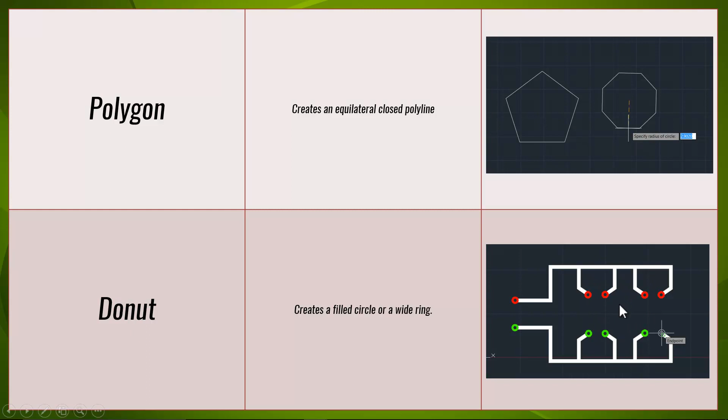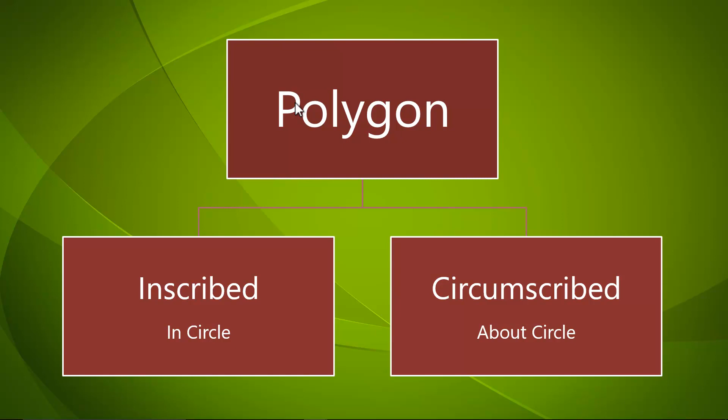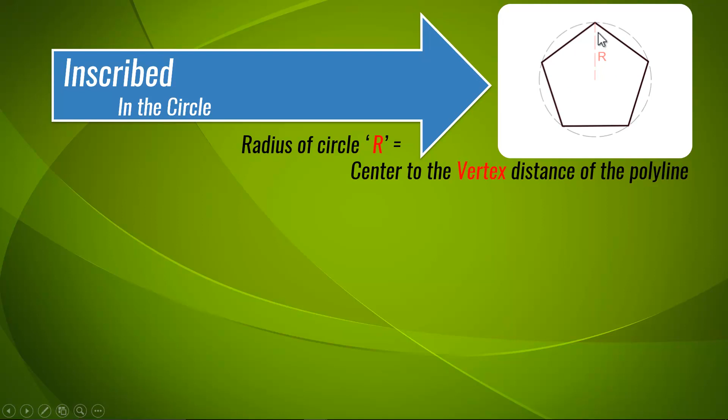So let's learn more about polygon. There are two options to create a polygon: inscribed in circle and circumscribed about the circle. When you use the inscribed in circle option, the polygon comes inside a circle. As you can see in the example, there is a dotted circle shown, meaning the polygon is inscribed inside an imaginary circle with radius r. So the radius of the circle, r, equals the distance from the center of the polygon to the vertex of the polygon, like this.

The next method to draw a polygon is circumscribed about the circle, meaning the polygon circumscribes a circle, so the circle is inside the polygon. Here it is entirely opposite - the same circle of radius r now denotes the distance from the center of the polygon to the midpoint of the side of the polygon. So there is a small size difference in the polygon, whereas the radius remains the same in both methods. You have to use the accurate method to draw your polygon.

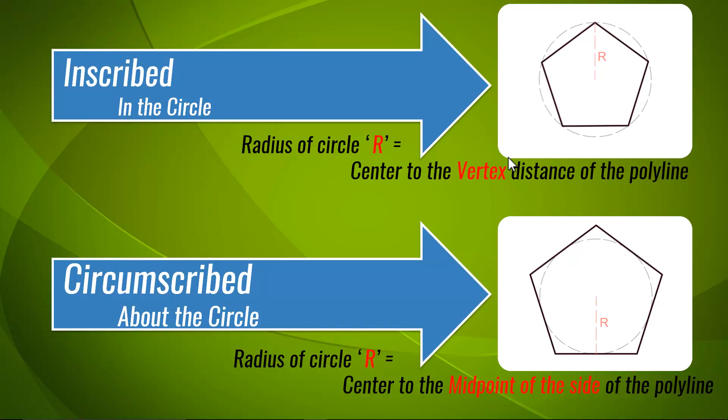So now let's see these options in the software. To draw a polygon in your drawing, use POL, that is polygon, and press enter. Initially AutoCAD will ask you to enter the number of sides. The default value is 4. You can enter a minimum of 3 to a maximum of 1024 sides. Let me give the number of sides as 5 and press enter.

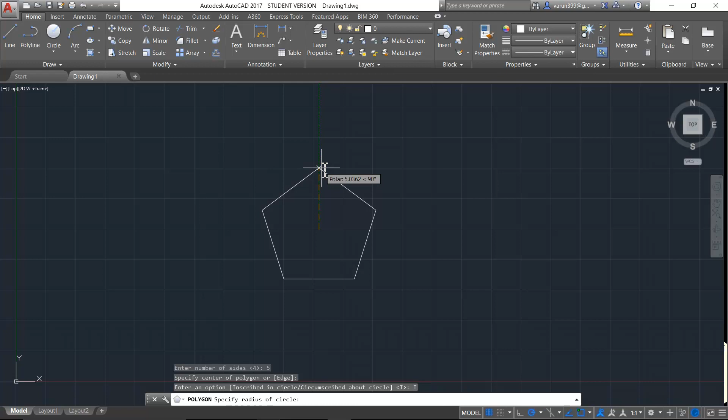Now it's asking to specify the center of the polygon. Let me specify the center somewhere here, like this. Now it's asking whether you want inscribed in circle or circumscribed about the circle. I will go for the first option, inscribed in circle. Now you have to specify the radius. For the time being, I will specify the radius as 5 and press enter. So accurately, my polygon of radius 5 inscribing in circle has been placed.

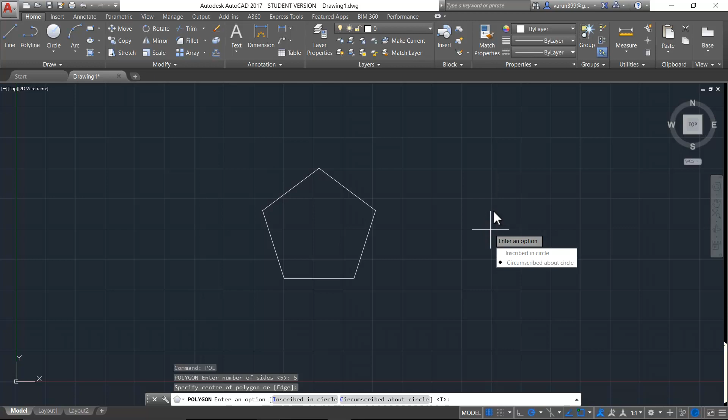Similarly, let me draw another polygon of 5 sides, aligned exactly with the same center point of this object. This time I will go for the second option, circumscribed about circle, and give the radius as 5 itself. So now you can see on both sides I have given the same radius, 5, but the method of creation was different - this one was inscribed in circle and this one was circumscribing about the circle.

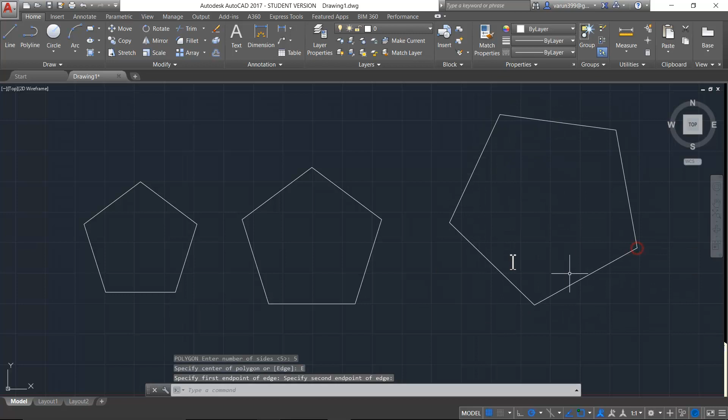There is one more way to create a polygon. Type POL and press enter. Let me give the number of sides as 5 and press enter. There is a subcommand called edge. Let me go for the option edge. Now it's asking to specify the first point of the edge - here I will denote one of the edges of the polygon. Let me denote the first point, and the second point somewhere like this. So like that, you can also place a polygon similarly.

Let me create another polygon with 6 sides, using the same edge method, like this, and your polygon is created like this. So it is pretty interesting to create polygons in AutoCAD.

The next command we have to learn is called donut. Donut is a filled circle, meaning it consists of a filled area which denotes it as a ring. You can use donut to specify any point or to show connectors in electrical drawings, or else you can use donut to show elevations in civil drawings.

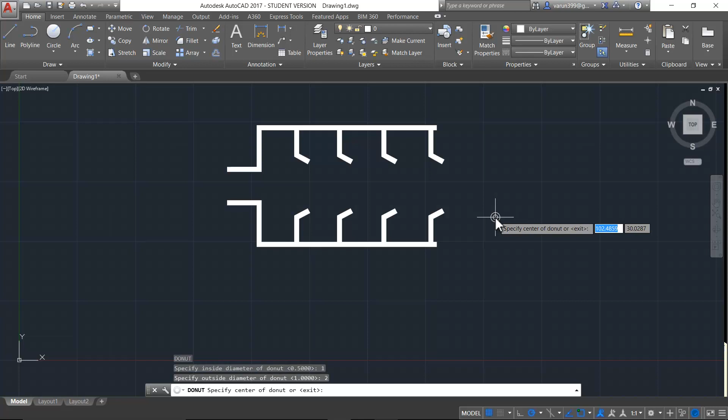So let me go for the command donut. The shortcut is DO, press enter. Initially it will ask you to specify the inner diameter of the donut. Let me denote the inner diameter as 1 and press enter. Now it's asking to specify the outside diameter. Let me denote it as 2 and press enter. So now you can see your donut has been created. You can place multiple donuts like this, so it will be easy for you to create and place your donuts. Like that, you can use donut in your drawings to show various things like this.